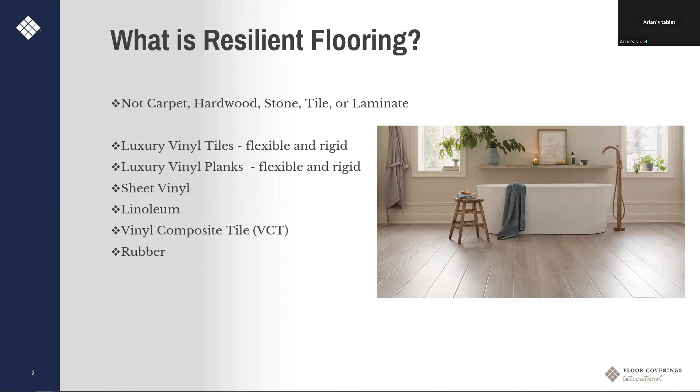We'll talk for just a moment about vinyl composite tile, VCT tile, as well as rubbers.

So when we talk about pros and cons of the resilient category - first, the pros: there is a wide price range, so you can find resilient floors that are very expensive and some that are very inexpensive. Typically, resilient floors are very durable. They're soft and warm underfoot, low maintenance and easy to clean. They're great for bathrooms and kitchens because most of them are either waterproof or have some semblance of water resistance, and they're non-porous, so that makes them easy to clean. They don't typically stain very easily.

Cons: they are a temporary floor. What I mean by that is, when you're thinking about real estate, there's only two types of flooring that actually add value to the home - one is tile, one is hardwood. Carpet doesn't add value, and resilient doesn't add value. So even if you spent a lot of money on a really expensive luxury vinyl plank, it's still considered a temporary floor and does not add value to the home. It might make the home easier to sell, maybe more appealing, but it doesn't really add value to the home.

Inexpensive vinyls can easily tear. I'm sure you've heard, or will hear, horror stories of people that had sheet vinyl in a kitchen or bathroom, maybe a laundry room - they moved the dryer, the washing machine, the refrigerator, and it ripped the sheet vinyl. So inexpensive vinyl can very easily tear. And certainly for inexpensive or improperly installed sheet vinyls, seams can be visible - and when you see a seam in the middle of the kitchen, it just doesn't look good.

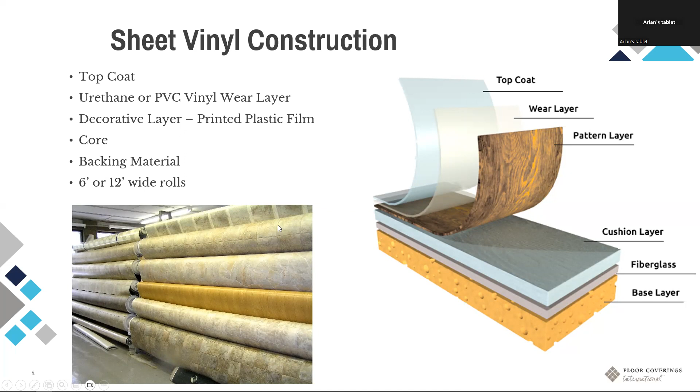So in order to install this, it really does have to be rolled out, and the floor has to be flat. This is really important when you're looking at doing sheet vinyl floors - the floor has to be flat.

If there is any imperfection in the subfloor whatsoever, it will telegraph through. So if you installed this on a concrete floor and that floor had a little dip in it somewhere, you're going to see the dip in the sheet vinyl when it's installed. Let's say you put it over a piece of plywood that has cracks or knots in it, you are absolutely going to see those cracks and knots.

So normally what you have to do is put down an underlayment before we get started, and I'll show you a picture of that momentarily.

Normally, sheet vinyl is glued. There are some sheet vinyls, not all of them. You have to be careful and pay attention to the manufacturer's recommendations, but normally they're going to be glued. Some, a very limited number, can actually be perimeter glued, where you're just gluing around the edge. Some can be taped down, like a perimeter tape. Some can be loose laid, but again, you need to check the manufacturer's recommendations for that specific vinyl. Some are designed to be done that way and some are not.

In terms of looks, yes, there are sheet vinyls that look like wood. There are sheet vinyls that look like stone or tile, mosaics, patterns. Just because it says sheet vinyl, don't shy away from it. There are some sheet vinyl products out there that look really, really good. So I wouldn't necessarily hesitate to use a sheet vinyl floor, but understand that if you want it to look better, you're probably going to have to pay a little bit more for it.

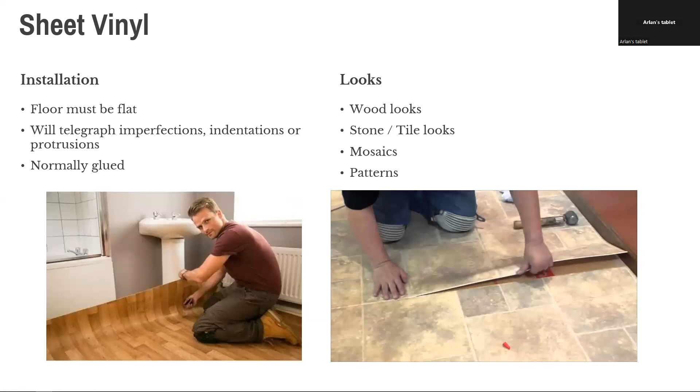So where did luxury vinyl planks come from? Well, originally, and I'm going to embellish the story a little, you had sheet vinyl—and linoleum before it—which was essentially the first waterproof floor. But it's hard to install; you've got to deal with these big, heavy rolls. At some point, somebody decided, well, if we just cut this into strips, it'd be a whole lot easier to install, especially since the customer would know it's not a matter of seaming it, you're just going to glue it down into place. So that's essentially what happened: the idea of sheet vinyl became, let's just make this into planks.

Now you've got a couple of different types of planks. You've got luxury vinyl tile, which looks like tile, and luxury vinyl plank, which looks like a wood plank. This industry is rife with vocabulary that doesn't make any sense. You will hear people, you will see companies advertise luxury vinyl tile, and it all looks like wood, or luxury vinyl plank and it all looks like stone or tile. This is not an industry standard, it's just a convention. Luxury vinyl tile, or LVT, looks like tile, and luxury vinyl plank looks like wood planks.

But again, you're going to see it advertised a hundred different ways, and you're going to hear customers talk about it in a lot of different ways. Either way, luxury vinyl tile and luxury vinyl plank are individual pieces, and they are either glued or floated depending on the construction. Sheet vinyl, again, is a rolled good, 6 foot or 12 foot wide, and it's normally glued in place. Now back to luxury vinyl planks.

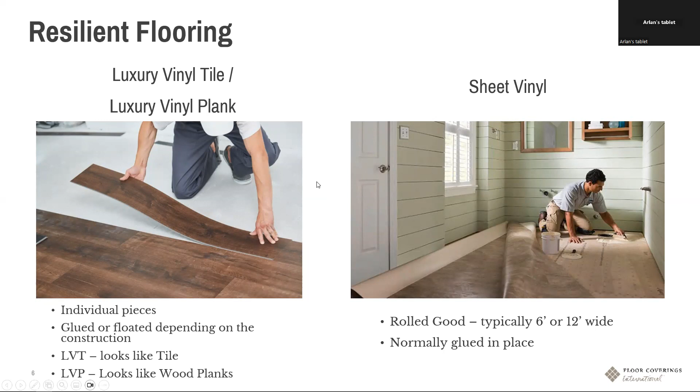You will find, in big categories, either a glue-down version or a floated rigid version. You see this plank here, right? It's very flexible, you might even call it floppy. In this case, the floor has to be 100% flat because it's going to telegraph, like we talked about, those imperfections through. There's nothing wrong with this floor, nothing wrong with a flexible, floppy, glue-down version. It's just that you have to make sure the floor underneath it is flat.

Then there's the floated kind, and this is the most common kind. As a matter of fact, in the mobile showroom, I believe like 98% of the luxury vinyl planks you have are this rigid kind. The reason they're so popular is because you can cover minor subfloor imperfections. I'm not saying you're going to be able to bridge a 2-foot gap, but if you have a little half-inch knot or something in a piece of plywood, you can easily go right over it with this and have no trouble whatsoever. Most of these have attached underlayments, so you don't even have to worry about an underlayment per se.

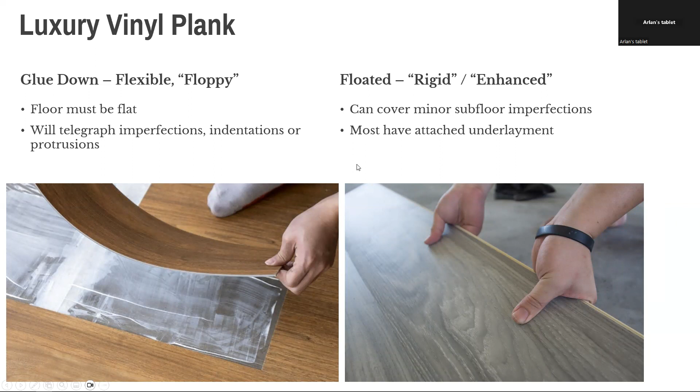Rigid luxury vinyl planks come in 2 main types, and then I'm going to share with you a third one. The 2 main ones that you're going to see in the market are WPC and SPC.

Now, what does WPC stand for? Well, when this was originally designed, there was a company that's no longer in business called US Floors. US Floors created COREtec. COREtec was eventually bought out by Shaw, so the product is still out there just under the Shaw name instead of the US Floors name. When US Floors developed COREtec, they developed this core, this rigid core that's on the inside of the rigid luxury vinyl planks, and they used wood fibers in it, creating a wood polymer core.

So it was a mixture of, let's just call it sawdust, wood fibers and a PVC polymer base, and it created a very rigid core. There are people out there today that will still call this a wood polymer core because that's what it started with, but there's no manufacturers today that use wood in it anymore.

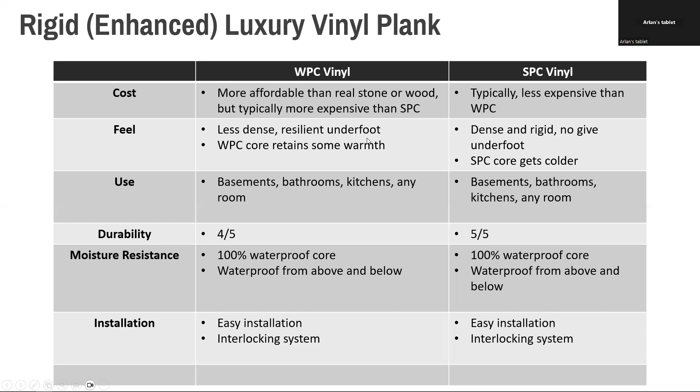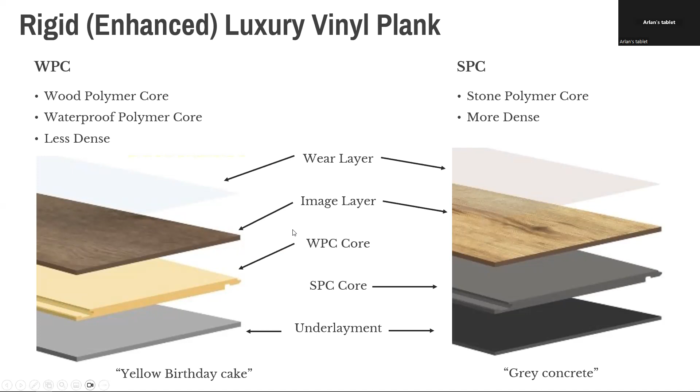So there's WPC and SPC, but there's now a new one on the market called a mineral core. This mineral core is extremely dense, and typically these mineral core boards are much thicker than a WPC or SPC board. They're extremely dense, so you're not going to have trouble with heavy furniture on them. A lot of these mineral core boards are designed so even pets can't scratch them, they're very scratch resistant, and there's no PVC in this product whatsoever. So look for those mineral core boards in your sample boards, and notice the difference between the yellow birthday cake versus the gray concrete versus a really thick mineral core. You'll be able to look at the edge of the board and tell the difference.

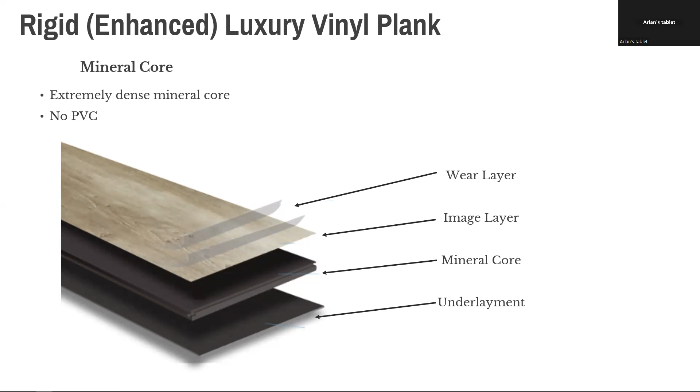Now, one note about all of these products, whether it's sheet vinyl or luxury vinyl plank, rigid versus flexible, no matter what, all of these are man-made products, okay?

Flooring materials are produced in run numbers called dye lots. To prevent inconsistency in product appearance, make sure that when you order material, you're getting it all from the same dye lot. Normally this isn't a problem, but you'll have customers who went to Big Lots, Costco, Ollie's Bargain Outlet, or other liquidators to buy their material.

If you end up with different dye lot numbers, the floor will look different once it's installed. If you're stuck with different dye lots, at least mix those boards from multiple cartons so it doesn't look like half the room was done in one dye lot and half in another. The customer will be able to tell the difference, and it won't look good, so just be cognizant of it.

Most of the time, if you're ordering from a Shaw or Mohawk manufacturer directly, you won't run into this problem because they'll ship you material all from one dye lot. It's normally when a customer has gone to one of these liquidating companies, like Ollie's, Big Lots, or Lumber Liquidators, that get rid of a bunch of material at once, that you run into problems with dye lots not matching and the floor not looking good.

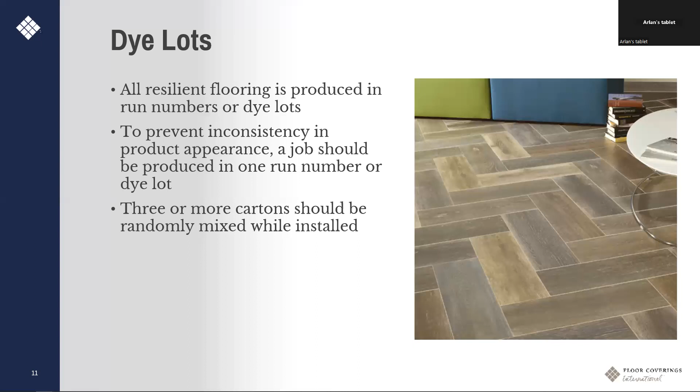We talked a little bit before about sheet vinyl. Well, the predecessor to sheet vinyl was linoleum. If you go back to your grandmother's house, she probably had a linoleum floor in the kitchen—it was the original sheet floor.

When the petroleum industry came on board and started making flooring, vinyls were made into sheet vinyl, and it was much cheaper than linoleum. It actually held up better too, because linoleum would eventually yellow and fade over time.

Today there's a company called Forbo that makes a product under their brand name Marmoleum, which is essentially like linoleum. Linoleum was made with linseed oil—a natural product. Marmoleum is made from natural products and recycled materials: flaxseed oil, wood flour, pine resins, jute, limestone, and pigments. It is 100% natural.

Forbo is primarily a commercial company, though they do make some residential products with samples available. When you go to the Forbo website, you'll see a ton of commercial material. They make linoleum under the name Marmoleum, they make vinyl, they make luxury vinyl, and they make flocked carpet flooring.

Marmoleum is Forbo's brand of linoleum—it's not the same as vinyl flooring. It's typically referred to as linoleum or lino floor coverings, made out of 100% raw, natural materials. There are no synthetic materials like PVC, plastic, or polyolefin.

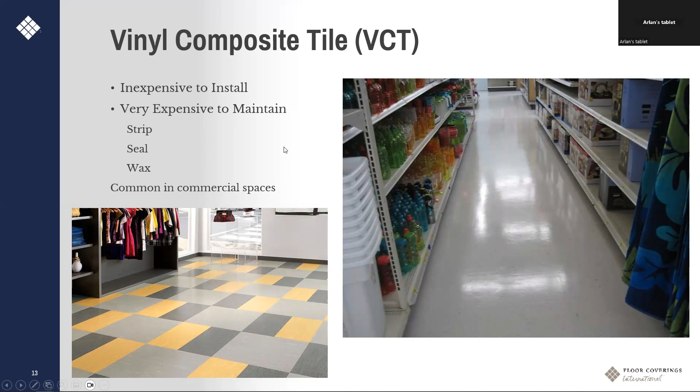One other resilient product we'll talk about is rubber flooring. You're probably not going to be competitive if the next Planet Fitness opens up in your area and they want you to cover it with rubber. That's probably not where you're going to be able to compete. However, you do have rubber flooring in your warehouse samples and your studio sample collection, essentially so you can handle a home gym. You go into someone's house, they want hardwood in the living room, carpet in the bedrooms, and they want to take one bedroom and convert it into a home gym. That's where you're going to be able to play, okay?

Rubber flooring is available in mats, in rolls, and in interlocking tiles. These interlocking tiles are kind of neat because you snap them together—there's no glue or anything. Mats and interlocking tiles are typically floated. The rolled rubber typically has to be glued down. But the interlocking tiles, you can simply lock together like puzzle pieces, and you're done.

Oftentimes you might have a customer that's just looking for a mat. So maybe they don't want to rip out the carpet in a particular room, or rip out the LVP they've already got, but they want something to protect it. You can get rubber mats to do that, and they can put their exercise equipment on top of the mats without gluing them down—you can simply flop them into place. You don't necessarily have to glue the rolled rubber down, it's just more common to do so.

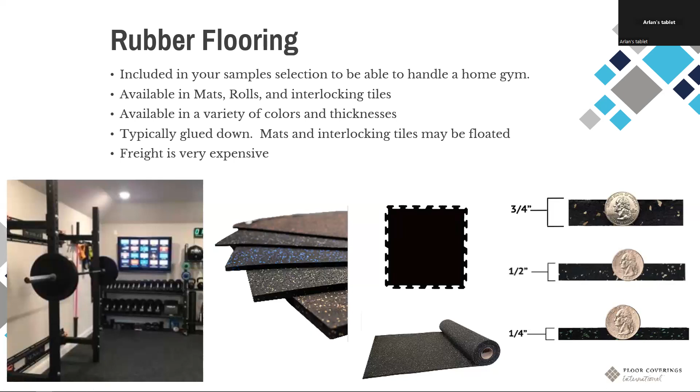All right, so let's shift gears and talk a little bit about installation. For most of these products, you just have to let them acclimate to room temperature. You're not worried about keeping a product in the house for 10 days for the humidity to come into play, because most of these products don't absorb humidity.

It just needs to be the same temperature as what's in the house. Most of the time, that means a same day installation. The only time you might leave it overnight is if your product is stored in an unheated warehouse, like in the middle of Minneapolis, where it's 32 below zero. You might want to bring it in out of the cold and let it warm up before it gets installed. But most of the time, a same day install is going to be the key.

If you are gluing something down, that substrate or subfloor has to be flat. It needs to be smooth, flat, clean, and dry. Concrete needs to be prepped, so if there's a dip in the concrete, you put in a little self-leveling compound to fill the gap. If there's a hump in the concrete, your installer may be grinding that hump down, especially if there's a spike.

If you are gluing down, you are going to be using a 1/4 inch or 5 millimeter sanded plywood. Some people call it Luan, some call it just underlayment. This photo shows an installer stapling down that 1/4 inch underlayment. SurePly is just a brand name, and it shows up under a lot of different brands, but it's basically a sheet of plywood that's very, very smooth, allowing you to install a glue down product directly on top so it looks smooth and nothing telegraphs through.

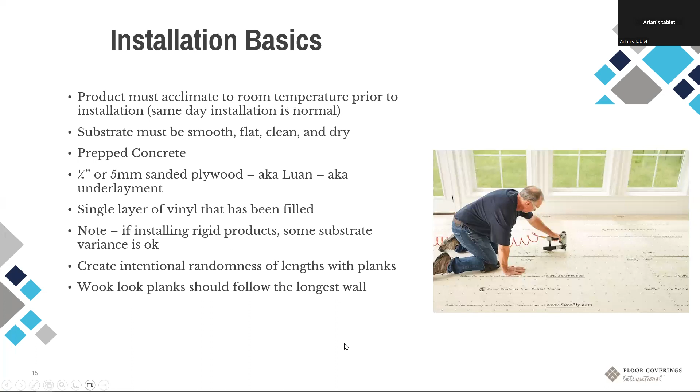Your installer is going to want to create some intentional randomness with the planks, so end joints don't need to line up with one another. And for visual sake, typically your wood look plank should follow the longest wall.

Installation options: how does this stuff get installed? Sheet vinyl is normally a full spread glue down. There are some sheet vinyls that can be loose laid, perimeter bonded, or taped down, but you need to check with the manufacturer that that's the case for that specific product. It doesn't mean all of Shaw's sheet vinyl can be loose laid, for example. No, Shaw makes some that has to be glued down, some that can be loose laid, and some that can be perimeter bonded. So it's on a material by material basis. Just check the manufacturer's installation recommendations before you determine how you want to install it.

For luxury vinyl, there's full spread glue down, as is the case with your flexible, floppy luxury vinyl planks. There are some with pre-applied adhesive, and there are some floated ones out there. And of course, your rigid luxury vinyl planks are typically floated. Installation options are always product specific, so just check those.

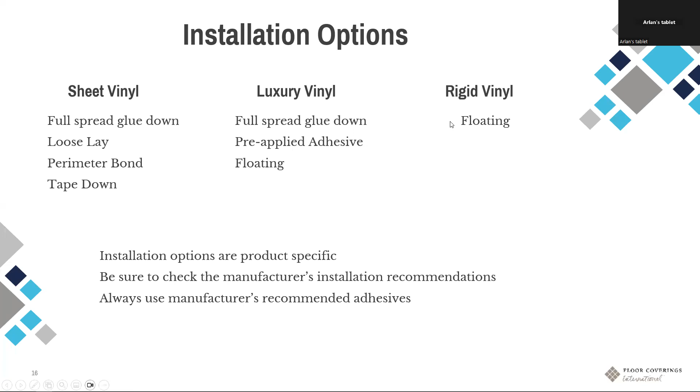Now, when we talk about floating, particularly a rigid luxury vinyl plank, most of them are going to have some kind of locking system. Some of the flexible, floppy luxury vinyl planks do have a locking system, but it's rare—most of those are just going to be glued down. The rigid ones, enhanced rigid luxury vinyl planks, almost all of these are going to have some type of locking system.

This locking system is going to go by different names. As manufacturers develop their own version of the locking system, they give it a fancy name like click lock, angle tap, drop lock, or fold and tap. You'll see this nomenclature is different on many of your sample boards and different as you look in the market. But whether it's click lock, angle tap, drop lock, or fold and tap, basically it means one board fits inside the other and they click or lock together in such a way that they don't pull back apart.

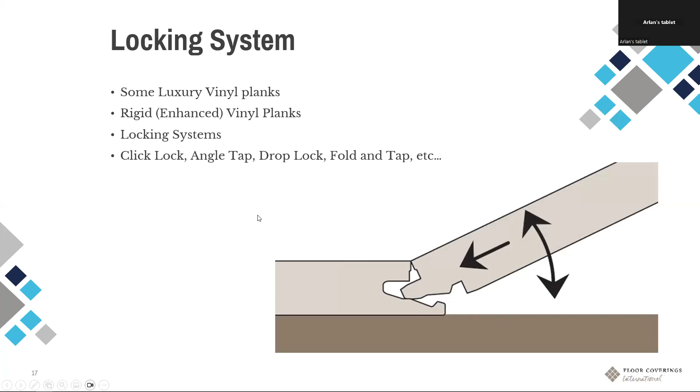So most of your rigid luxury vinyl planks have some type of locking mechanism. Now, as you're trying to sell the product to the customer, this doesn't really matter. This is more for your information so that you understand how these things go together.

The pre-applied adhesive, most people will call this a peel and stick. It shows up on some luxury vinyl planks where you've got a pressure sensitive adhesive already on the plank, and you have to pull the backing off before you can stick it down. This is normally a low-end do-it-yourself type board. There's not many of these. There might be one in the mobile showroom, but most of the time this peel and stick vinyl plank is typically a low-end do-it-yourselfer.

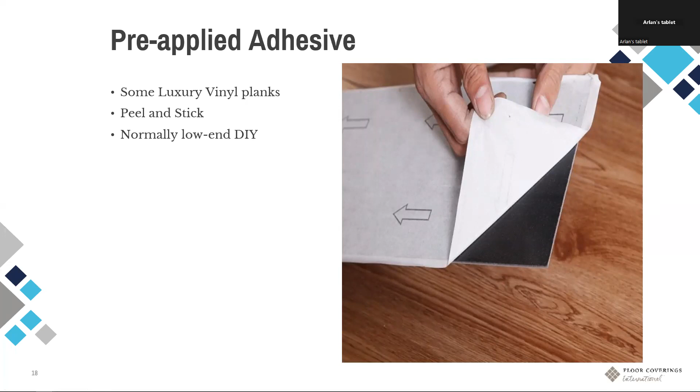Now, higher end are grouted vinyl tiles. There are vinyl tiles that look like tile that actually get grouted. When an installer puts them down, they use spacers just like tile. As a matter of fact, it might be your tile installer that does this because they're accustomed to working with spacers. The grout is different than a typical tile grout. Typical tile grout is a sanded, cement-based grout. These are acrylic grouts, specifically designed to go with the luxury vinyl tiles, so you'd get the grout from the same manufacturer that makes the tiles. But this is basically a glue down installation.

So what does that mean? It means the substrate has to be flat. In some cases, the tiles don't have to be grouted. You could install them just butted up one right next to the other. But in the case where they get grouted, again, get the grout from the manufacturer.

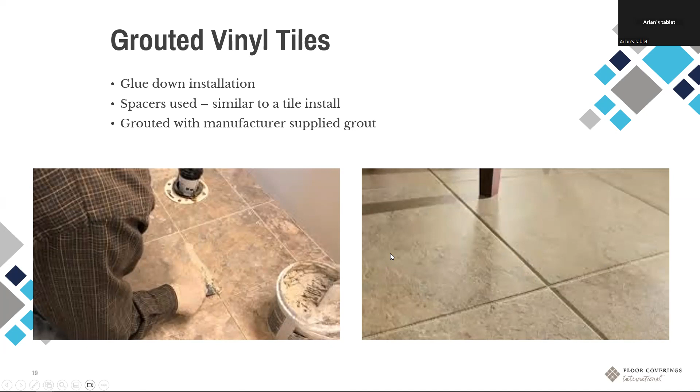How do you maintain these? Well, most of these are very simple to maintain. Dust mop, sweep it, vacuum it regularly. If you're vacuuming, I'd recommend turning off the beater bar, the little rotating brush, so you're only using the suction and not causing additional wear to the top of the boards. You could easily damp mop this from time to time with plain water or spot clean it with a vinyl cleaner. Most of the time I see customers go for these Swiffers - they're very simple and make it easy to clean.

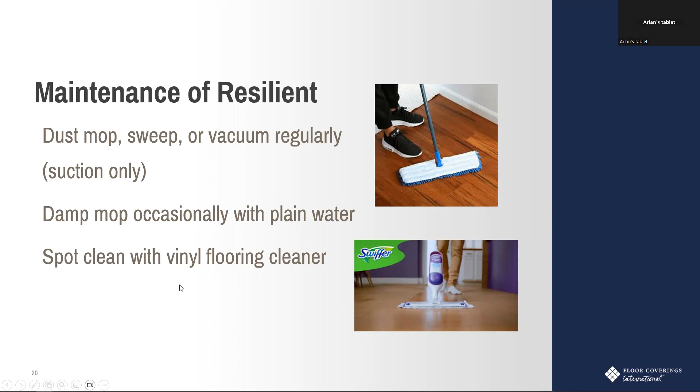So sort of summarizing what we've done here: resilient flooring is very durable, but the durability will vary greatly depending on the product and even the cost of the product. So sheet vinyl, for example - there's really cheap sheet vinyls that are going to rip easily, and there's very expensive sheet vinyls that are very tough. Just understand that durability is going to vary greatly depending on the product.

Most of them do resist scratching and staining, but again, that's going to vary. Most of them are waterproof. I know I've got here that some are waterproof - the reality is that most of them are waterproof, but be careful, that doesn't mean you're making a water barrier for your subfloor. It just means the product itself is waterproof. There are some that actually do have a waterproof seam, and in those cases, yes, you really are creating something special for the customer.

Some can be grouted. Almost all of them are very easy to maintain. They're relatively inexpensive, and when I say relatively inexpensive, typically they're less expensive than what they're trying to mimic. So a luxury vinyl plank mimicking hardwood is more than likely going to be cheaper than the hardwood it's trying to mimic. A luxury vinyl tile mimicking natural stone is more than likely going to be cheaper than the natural stone. And there's a ton of designs out there. Are there limitations?

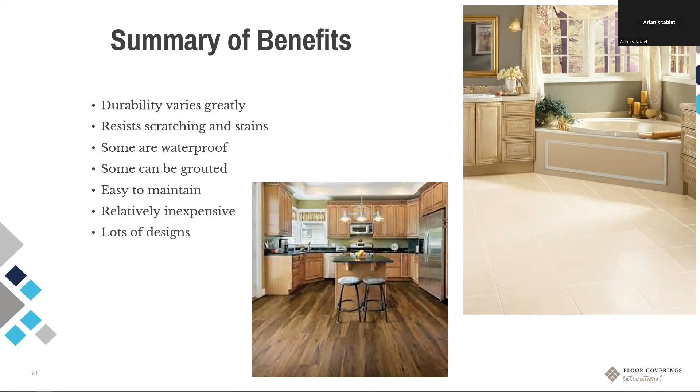The market has made it sound like luxury vinyl planks and resilient products are bulletproof. They are not. Floor prep can be expensive, especially if you've got to put down that 1/4 inch plywood. That plywood is expensive, and it's expensive to install. So that floor prep can be costly if you're trying to glue something down.

But improper prep, if you don't do it, that's where most installation issues come from. Seams can be visible on sheet vinyl if they're not done well. Inexpensive vinyl looks fake and seams start to curl. You might have a product where the top layer peels off or it buckles in the middle if it's not installed properly, or if you put a really inexpensive product in somebody's home. This is truly one of those categories where you get what you pay for.

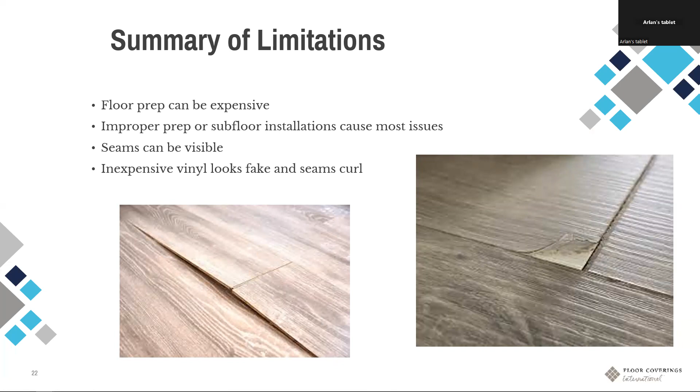If you spend a little more money on it up front, you're going to get something that's going to last a lot longer. Now, we've talked about this, but I'm really going to highlight it hard: if you're installing a flexible glue down resilient, the substrate must be flat, okay?

There is a common mistake that people make: the tablet is going to default to 1/4 inch plywood. When you select in the tablet that you're doing a luxury vinyl plank floor, the tablet will default that you need 1/4 inch plywood. The reason it does this is on purpose, to keep you safe. So it adds that in there, and it's up to you to take it back out. The tablet doesn't know if you're installing flexible or rigid — it puts it in there to keep you safe.

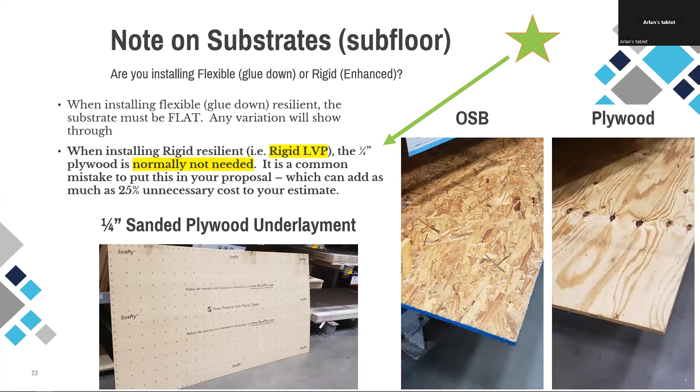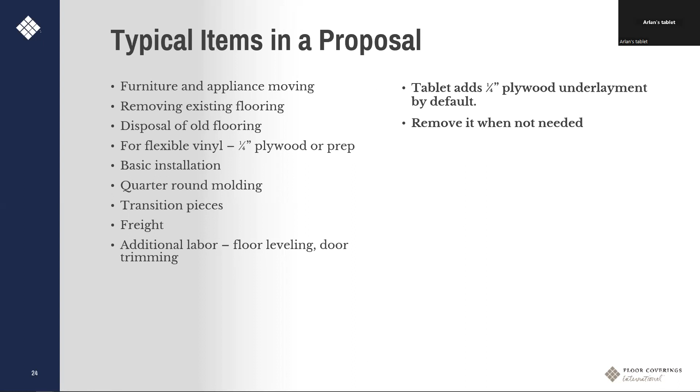You may need transition pieces and freight. Additional labor might be needed if you have to do floor leveling, or if you're going for one of the really thick mineral core boards, you might have some door trimming to do. Again, I'll say this again: the tablet adds 1/4 inch plywood underlayment by default. It does that to keep you safe, but you need to remove it when it's not needed. Otherwise, you're going to price yourself out of a lot of jobs.

Okay, I put together this little outline as sort of our final slide here. Well, one more after this.

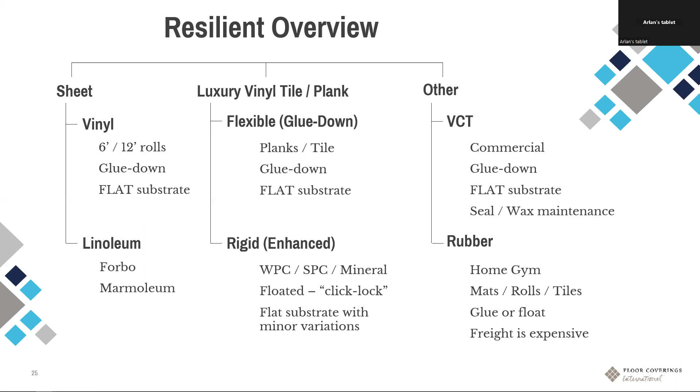So where do you go to get more information? There are literally thousands of pages written on resilient flooring, particularly on luxury vinyls. You can go to shawfloors.com or coretecfloors.com—both owned by Shaw—and both have great information on how to install it and what the product is. Cali Floors is the same company that was Cali Bamboo; now they've changed their name to Cali Floors, and they do a ton of luxury vinyl planks.

And matter of fact, we've got some really good ones in the mobile showroom. Mohawk Flooring is another great source for luxury vinyls. Happy Feet International, and Forbo specifically for Marmoleum.

In our collection, the Floor Coverings International collection, we have US Rubber as a rubber supplier. But there's another website out there I really like, called rubberflooring4u.com. You can buy from them if you set up an account, but I really like that website as a great knowledge base for what to do with different rubber. US Rubber's website is good, but I think the rubber flooring website is better. So you could go there to learn, and then buy from US Rubber or whatever you need to do.

Obviously, there's a ton of information on YouTube and Google. There's just a lot of information out there today on resilient products, specifically luxury vinyl planks. So become educated so that you can educate your customer on these. There's a lot more information than what we covered here. Get with your vendor reps as well and have them walk you through what is specific about their product that makes it stand out from everybody else's.